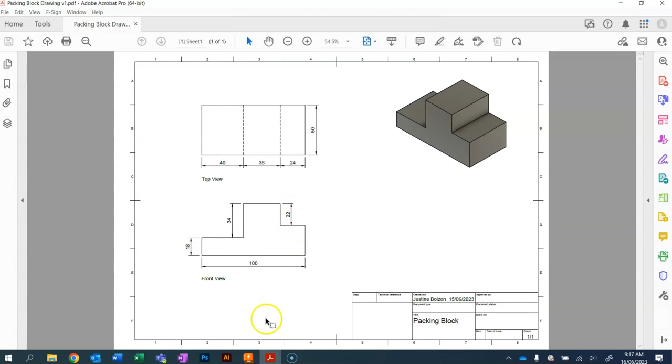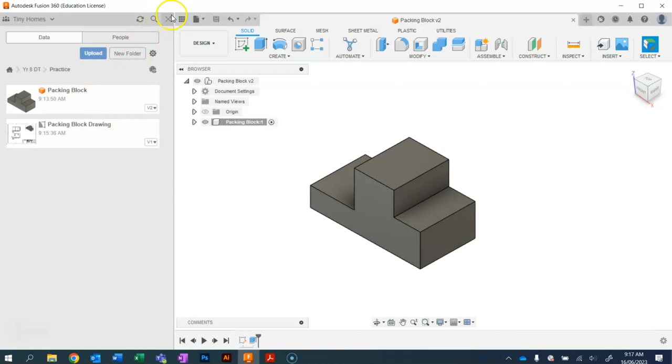So to create a drawing that looks like this, we're going to head into Fusion and open up your packing block. So to open up this file, you need to head into your data panel. So this little icon with the squares. You're going to find your Year 8 folder. So double click on that to open it. Find your practice folder. You probably only have the practice folder in here so far. And then find your packing block. Double click to open that. Once it opens up, just click the little cross up the top here to close the data panel.

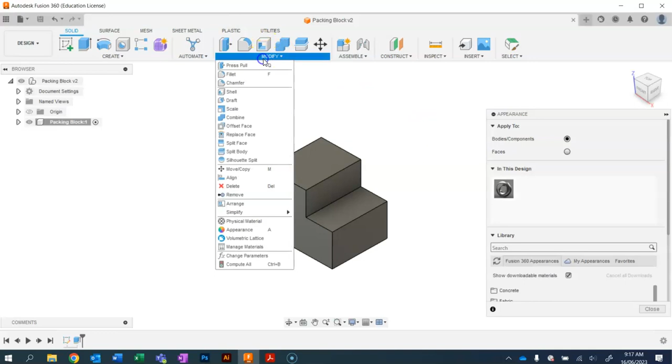All right, once the packing block is open, we're going to add a finish to this block just so that we can see it in the isometric view on our drawing. So we're going to type in the letter A for appearance, or you could go to modify and then find appearance in the panel there. Okay, either way you want to do it is fine. You're going to scroll down in this dialog box to the library, and you're going to keep scrolling, and we're going to make this one painted.

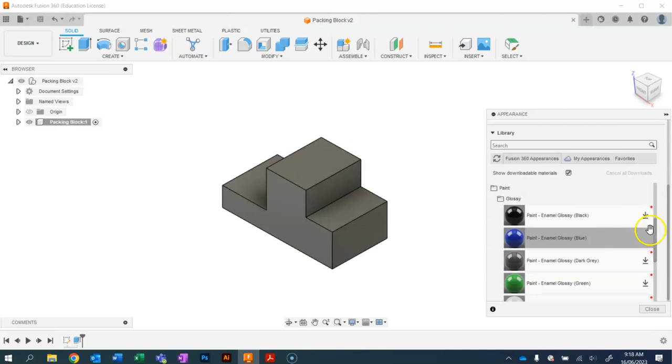So I'm going to open up the paint folder. I'm going to go with a glossy paint, and just choose a color that you like. Doesn't really matter what color. We're just going to have a go at putting a material on. So we click the little arrow next to whatever color you'd like to download it. Once it's finished downloading, that little blue box that you might have seen in the corner will disappear. You can then click and drag the material and drop it onto your product, your item, and then close. So you can see that I chose blue, so now my packing block is blue. So I'm just going to hit save there.

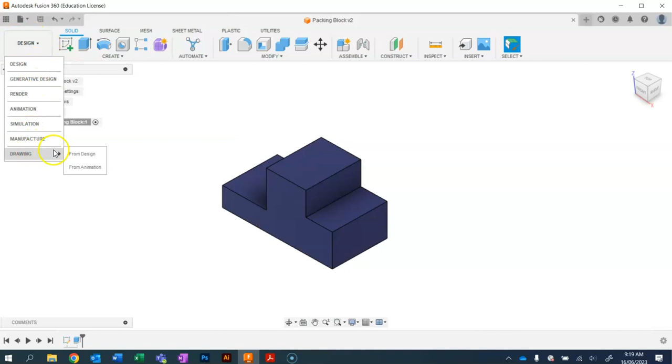Now that I've done that, I can actually create my technical drawing. So I'm going to head up to the top left of my screen where it says design. I'm going to click on that button and head down to drawing and choose from design. And that's going to create a technical drawing of whatever is on my screen in this file. And we don't need to worry about changing any of the settings in this dialog box. Let's just press OK.

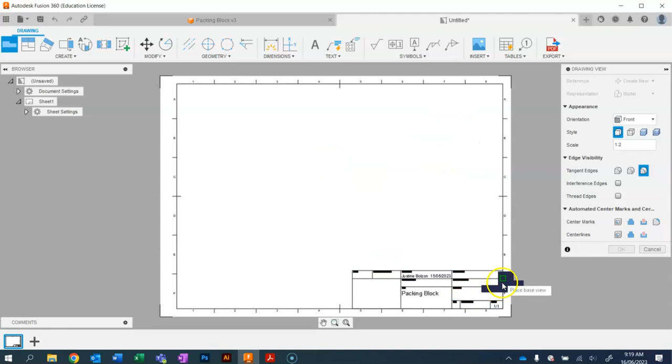Okay, so that's going to open up our technical drawing sheet, and you'll see that it has a title block which will automatically populate with the name of the item. So whatever you've called your packing block file, that will appear there. It'll also have your name and today's date, and it will also have a border around the page. Okay, you can see that it's automatically opened up one of the tools, which is the base view tool, and that opens up this dialog box here.

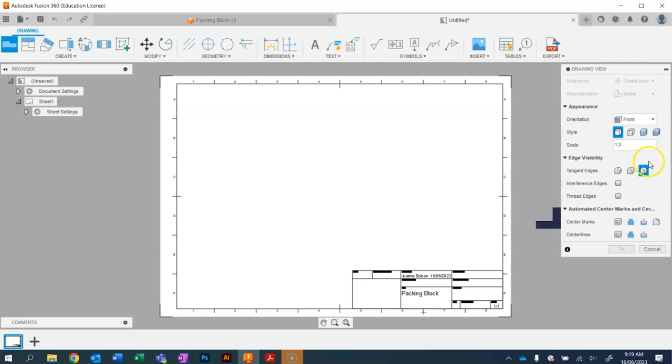So in this dialog box, we can choose what view we're going to be placing in. So I'm happy with the front view. If yours is coming in with a different one, you just click on the orientation menu and just click through until you find the front. Okay, so we're happy with that front view. I also want to make sure that my scale is 1:1, which means that 1 millimeter in real life is 1 millimeter on the page.

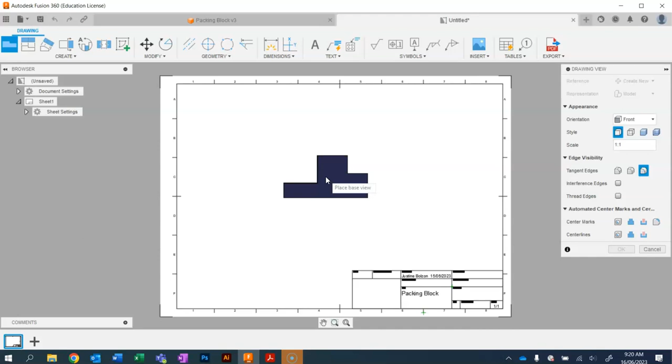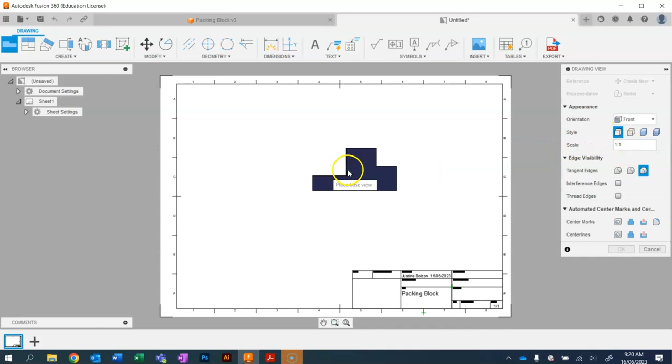If you had a really large drawing, let's say that you drew a dining table and you want to fit that drawing on an A3 page, we're going to scale it down so that 1 is to maybe 5, so that each 1 millimeter on the page equals 5 millimeters in real life. So a scale is an option there. We're just going to do 1:1. So we're just going to start by placing in this front view. I'm going to hover over towards the left of the page and sort of towards the bottom middle kind of area.

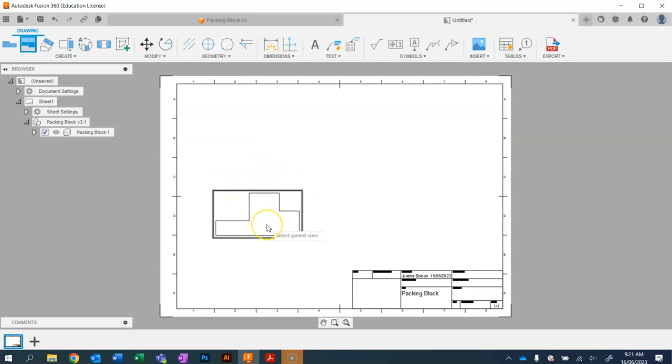I'm going to click once and hit OK. All right, so that's my front view. I now want to do my orthogonal projection, which is to get the top view directly above this front view. So I'm going to go to the projected view button, which is next to the base view. I'm going to select the view I'd like to project from, and then I'm going to hover up to show the top view. I'm also going to show the isometrics.

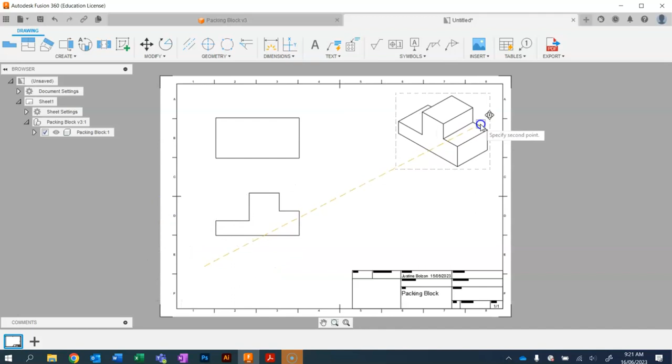If I hover down to the bottom left, you can see it's not really a very good view, so I'm going to hover to the top right and click there. And once I've selected all of those locations, I can then click and drag them to be in a different spot. Now, the isometric view can go anywhere on the page. The top and front view, however, are going to be locked into each other.

So that means if I wanted to move this top view over here, I couldn't. I could only move it up and down because it is locked to my front view. If I want both of these views to move over, I'm going to select my front view and drag it, and that will bring the top view with it.

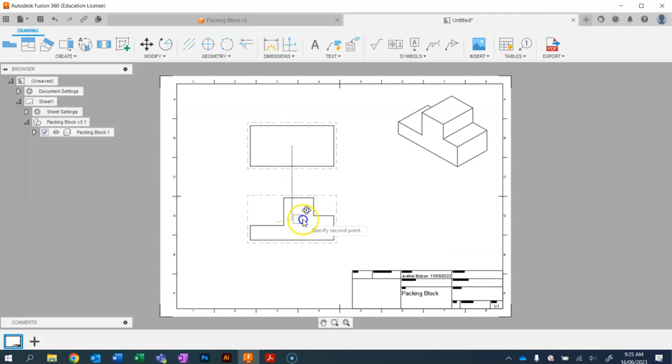Okay, so I can move these together side to side, or I can move them independently up and down, but I can't move my top view over here and my front view over here. They have to be lined up. If I had a side view, it'd be the same, where I could only move it side to side, locked in with the top and bottom of the front view. So that's our orthogonal views there.

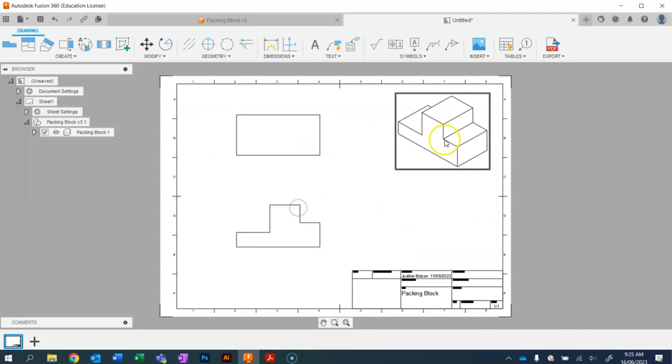Next thing we're going to do is make this one look like it does in the model, which is the blue color. So we're going to double click the isometric view, and we've got some style options up here. I'm going to click on the shaded option, so that little blue cube, and that's going to show me what that looks like if it was a real life material. And I'm also going to do that same thing for these views here.

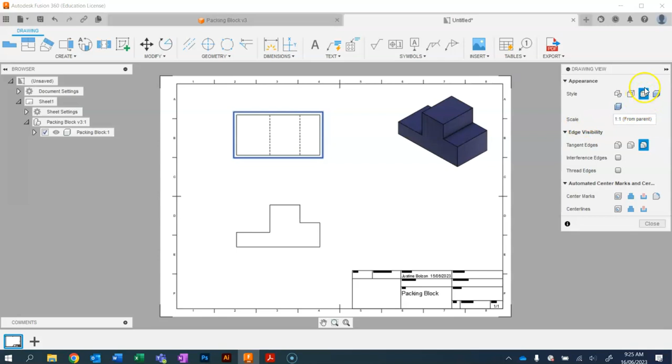I'm going to double click on the top view, and I'm going to change it to the visible and hidden edges box. So it's the box that has the dotted line in it, and I'm going to press close. And that actually shows me where this little division is in the heights of my packing block, which makes it easier for dimensioning. So now that I've got all of that information in, I can add in my dimensions.

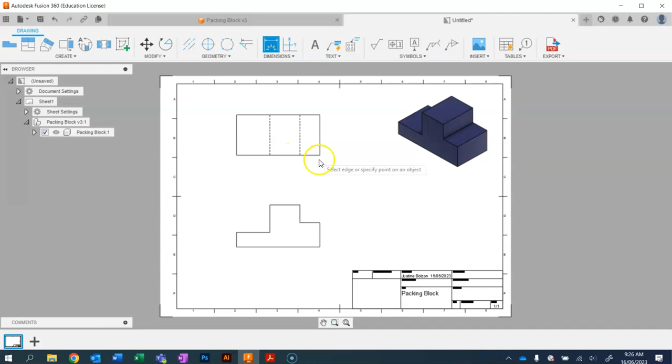So I'm going to click my dimension tool up the top here, and there are two ways you can dimension. You can either click the line itself, or you can click from one point to another. So for this top view, I actually want to dimension each of these sections individually. So I'm going to click, I'll just zoom in a bit. I'm going to click from the left-hand end point to this first point here where the dashed line is. I'm going to hover down and click to place it.

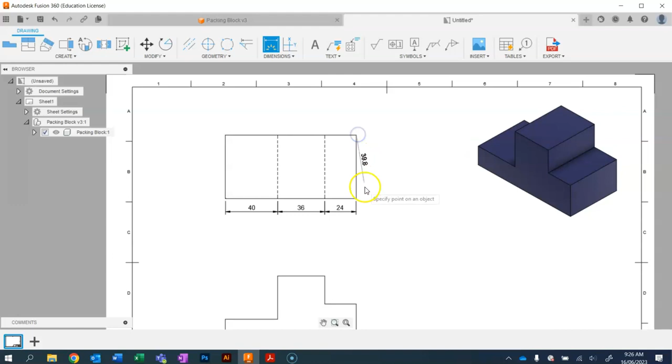I'm going to click again from that point to the next dashed line, hover down and click to place it, and do the same at the end here. So from the dashed line to the very end. I also want to know how deep this block is, so what the extrusion was, which is from one end to the other there, 50.

And for this block down the bottom here, I need to know the heights of everything. So I know all of the lengths. I need to now know how high this section is, this section, and this section. So I'm going to select the lines for this one because that's easiest. So that line there, that line there, and that line there.

When we put our dimensions on, we need to make sure that they don't sit on our drawing, so they don't cross over with the drawing. They're out over to the side. So just be careful with where you're placing them and make sure that your dimensions look the same as mine. They should be in the same locations roughly.

The last thing we need to do to finish off this drawing is to add labels so that we know what views we're looking at. So I'm going to head to the text tool up here. I'm just going to hover, so I'm in line with that last dimension, and hover down a little bit and create a text box. And this one is going to be top view. And I'm going to do the same down here with my text, select it again. I'm going to hover down a bit here and type in front view and close.

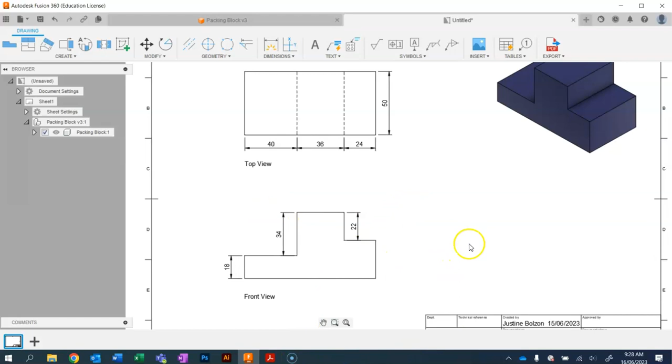And that should be all of the dimensions we need. So if I were drawing this, I would know that it's 18 mil up here, 40 in there, 34, 36, 22, 24, and then whatever's left over would be that height. And yep, that's everything that I need. Okay, so that drawing is now done.

Let's hit save, and it'll automatically name the drawing, and it should be saved in the same location as the original file. So just double check that. If you need to move it, then please do, but let's just hit save there. Last thing we can do is export this as a PDF. So I hit the PDF button up here, press OK, and then I just choose where to save it.

So I'm going to save it to my computer, so make sure that box is checked. And you can choose a specific location. So you might want to head to your OneDrive and find your Year 8 DT folder, and you can save that in there. And that is how you create an isometric drawing, sorry, a technical drawing.